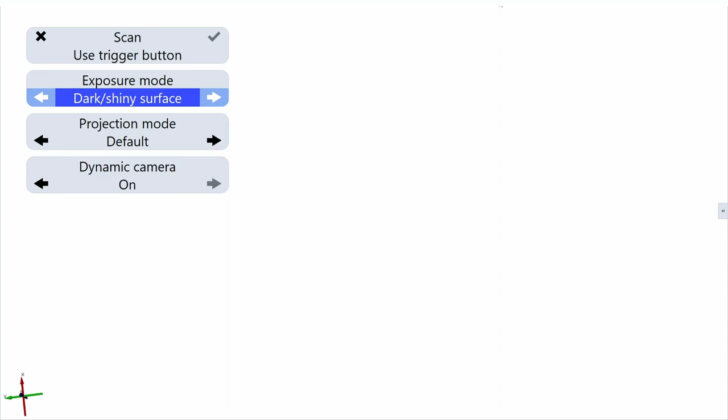I have here a black part, so I will set the respective exposure mode to the dark surface setting. You can see how easy and seamless the scanning process is.

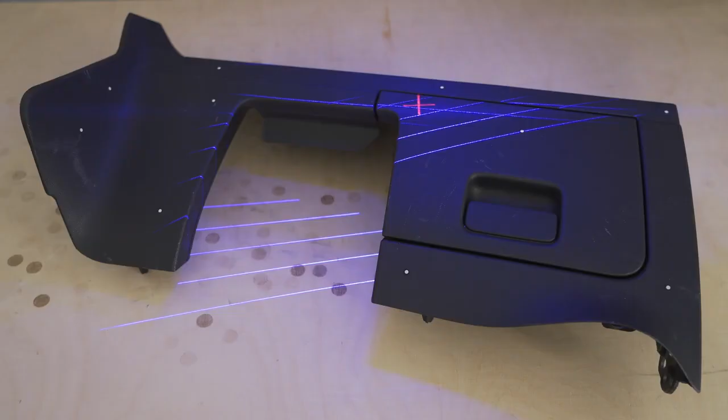For this shiny chrome part, we set the exposure mode to shiny surface and start our scan.

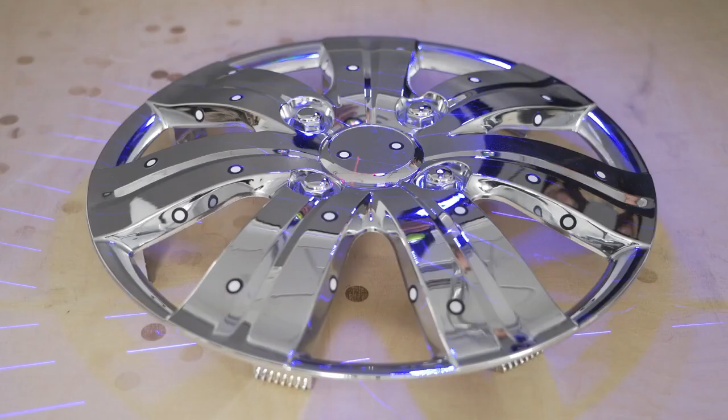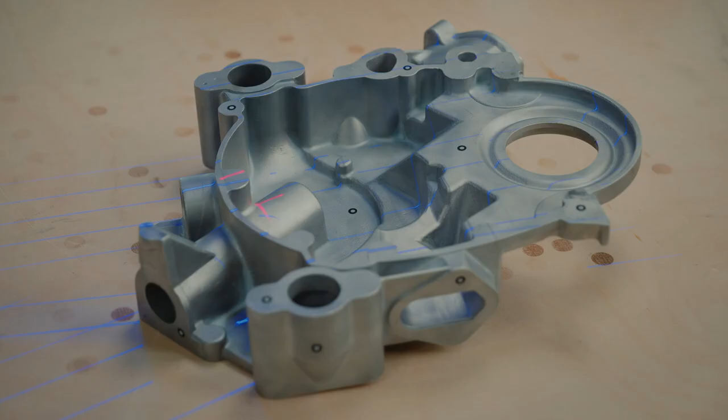Tip number 2: Scanner orientation. As you know, the scanner has a large field of view with a blue laser. As this consists of crosses, the orientation of the scanner is less important. Only when you have areas which are harder to reach does it make sense to orient your scanner with both cameras parallel to that part.

It's similar when scanning the side of a part. It makes sense to orient the scanner parallel to that area, as both cameras will capture the points.

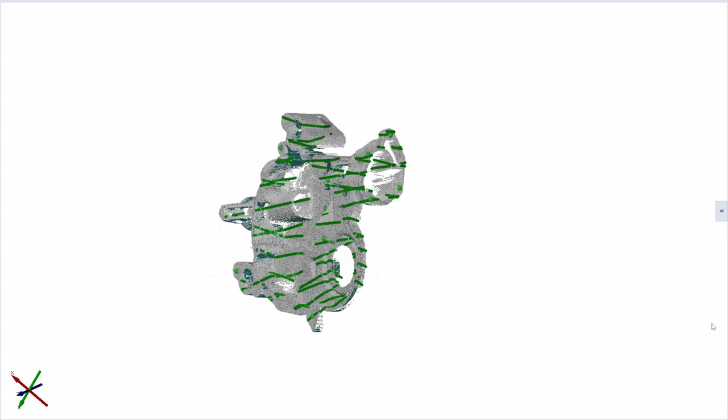When you switch to scan detail, it makes sense to move the scanner in a manner that the lines cover the area in a perpendicular fashion. This is to ensure you collect all necessary details.

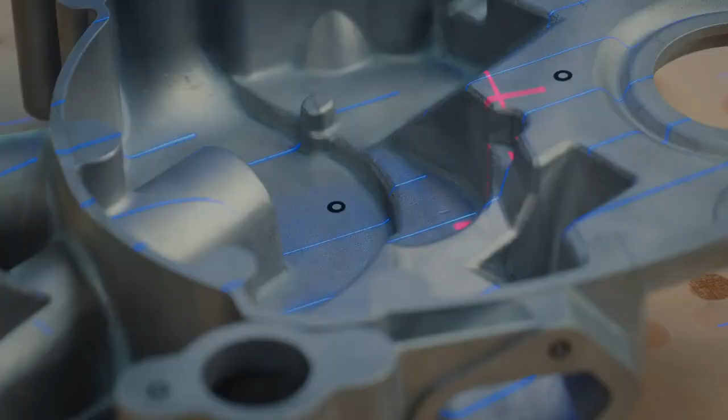For the single laser line to scan deep pockets, it makes sense to orient yourself behind the cameras. This will help you see the blue line to scan deep inside of pockets. You can also change the 3D view in the software to make the 3D view perpendicular to that part. This will help you to orient the scanner even better for scanning deeper pockets.

And the last tip on the orientation of the scanner: if you use satellite mode, it is not important to make nice pictures, but to orient the picture in such a way that the complete setup fills the picture.

Tip number 3: Cutting out background cards. Here is a setup of an old part on a trolley, a common scenario in production. In the unboxing video you have seen some white cards with reference points on them. These cards are very useful to quickly define a background plane and cut it out afterwards. Just put or stick these cards onto the plane or element you don't want to scan. Then define the background plane in the software. It's that easy. This tip also works with satellite mode.

Tip number 4: Defining your own remote workflow. You have seen that we guide you through a specific task with predefined templates. In your daily work, it could be that you have other specific tasks and you want to create a template to help guide scanning operators.